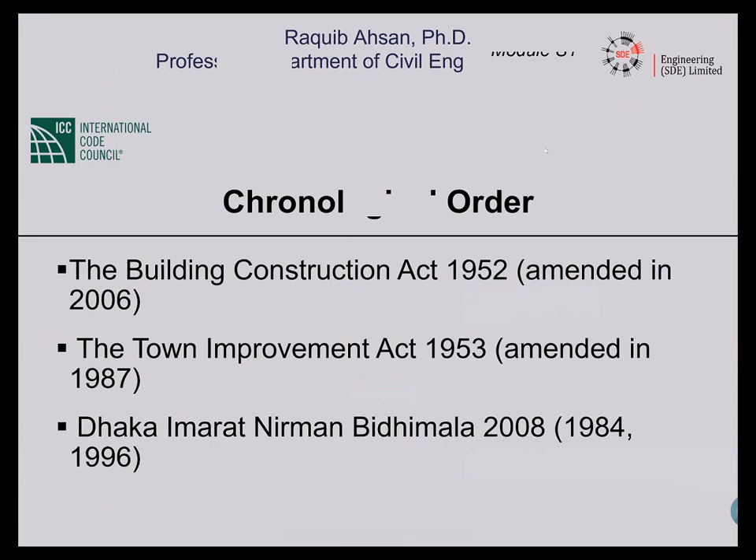Dr. Ghosh has already mentioned that the Building Construction Act came first. That was enacted in 1952. But later, this act was finally amended in 2006. During that time, the Bangladesh National Building Code was mentioned in this act. And the next year, in 1953, the Town Improvement Act was enacted.

It was amended quite a number of times. And the most important amendment came in 1987 when Rajuk was established. Before that, it was DIT, Dhaka Improvement Trust. But through the amendment in 1987 of the Town Improvement Act, Rajuk came into being.

And the last one, chronologically, Imarat Nirman Bidhimala, or Building Construction Rules, was drafted and changed quite drastically a number of times: 1984, then 1996 was completely a new set of rules, and in 2008 it was drastically changed. And presently we follow Dhaka Imarat Nirman Bidhimala that was drafted in 2008 and gazetted in 2008.

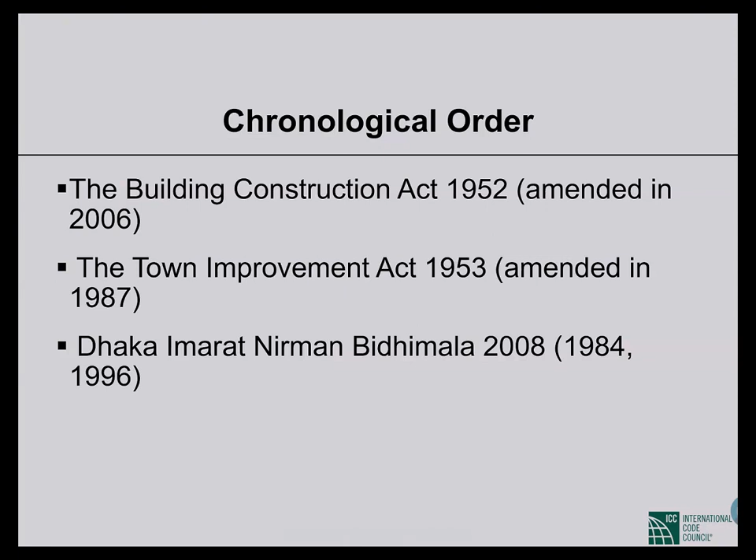So I'll follow this chronological order because this order makes it easy for us to understand the context of one law, how it is related to the previous one. So I'll follow this order instead. So first we'll talk about the Building Construction Act 1952.

And we can rather question how the act actually helped us to prevent the haphazard construction. So it's all up to you. We'll not go into that discussion, but that is the purpose. Second, what is the extent of this act? That is, where it is applicable. It is applicable over the whole of Bangladesh, in the entire country. So this is important. All acts are not applicable over the entire country, but this one is.

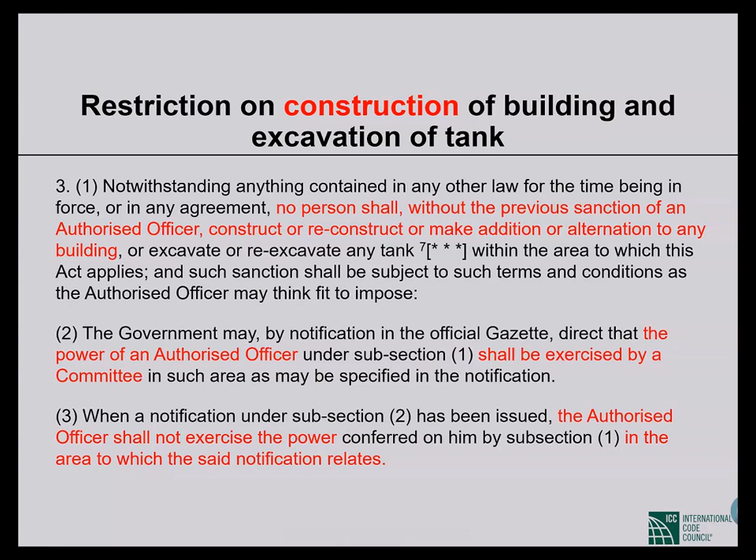Now, as it is mentioned that there are restrictions on construction of building, that is, you need permit to construct a building. Now, to use a building, you need permission, so that you cannot use a building improperly. So this is restriction on improper use of lands, not only building, lands and buildings.

If you use it for any other purpose, for example, in the permit it is written residential, if you use it commercially, you cannot do that. You need to take permission for that. You need to have permit.

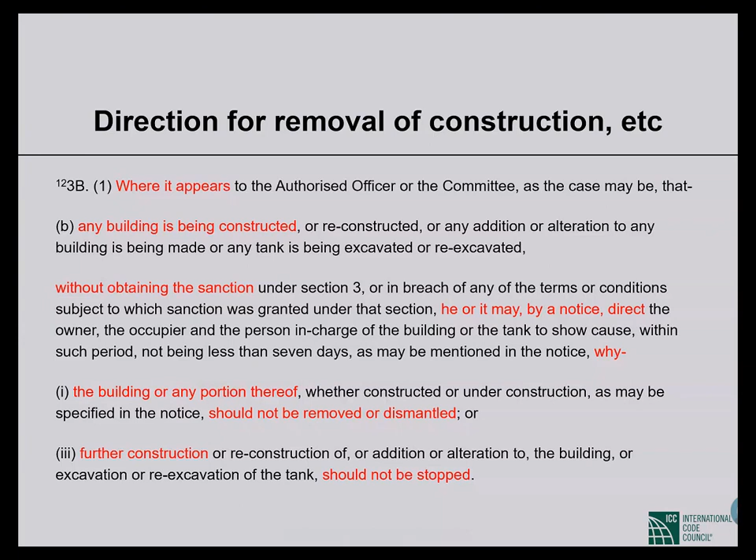So as soon as the notice is served, the owner must stop construction of that building. The owner cannot continue construction unless he shows cause and the cause is satisfactory and the case is vacated. Unless that is done, with the issuance of the notice, the construction work must stop.

Now, penalty. One power the authorized officer or committee enjoys is that they can direct stopping a construction or removal of a building, and at the same time this is a punishable offense. Violation of any provision of this act is a punishable offense. Let's see what it says. Subclause 12 is regarding penalty. 12.1 says, whoever commits an offense by — so what are the offenses?

A, contravening the provision of section 3, that is, you must have a permit. If you don't have a permit, you cannot construct. If you contradict that, that is, you start construction without a permit, then you are punishable.

B, failing to comply with any direction given to him by an authorized officer or a committee under section 3B, or by an authorized officer under section 4 or subsection 1 of section 5 — whatever the direction of the authorized officer or committee is, you have to comply with that. If you don't, you are committing a punishable offense.

C, designing or approving or implementing a building construction plan in contravention to any provision of the Bangladesh Building Code made under section 18A and the rules made under section 18. This is very interesting — here it is the first time that building code is mentioned in this act, in the penalty section clause, that whoever designs, approves, or implements anything in contradiction to the Bangladesh Building Code.

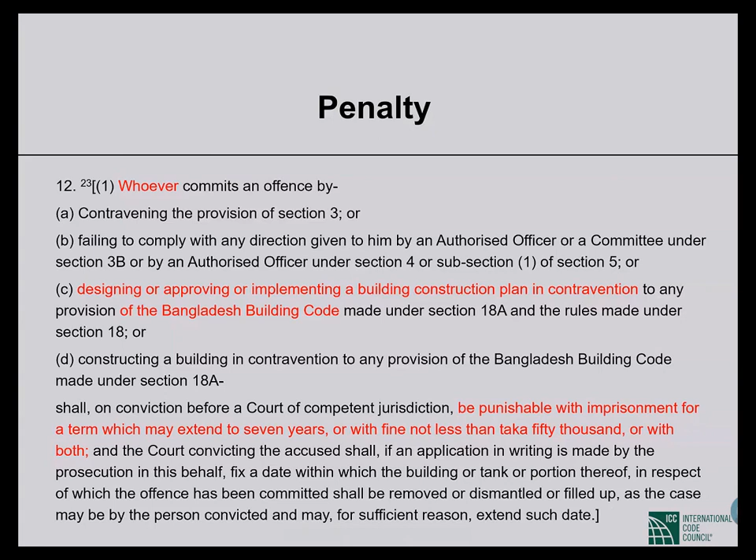Cognizable means the police can arrest the convicted person, or for alleged conviction, without any warrant. So a police can arrest if the authorized person or officer finds that this person is guilty. The police can arrest without warrant and start an investigation without the permission of the court. And non-bailable means he cannot apply for bail even. So he has to be in jail, or in police custody.

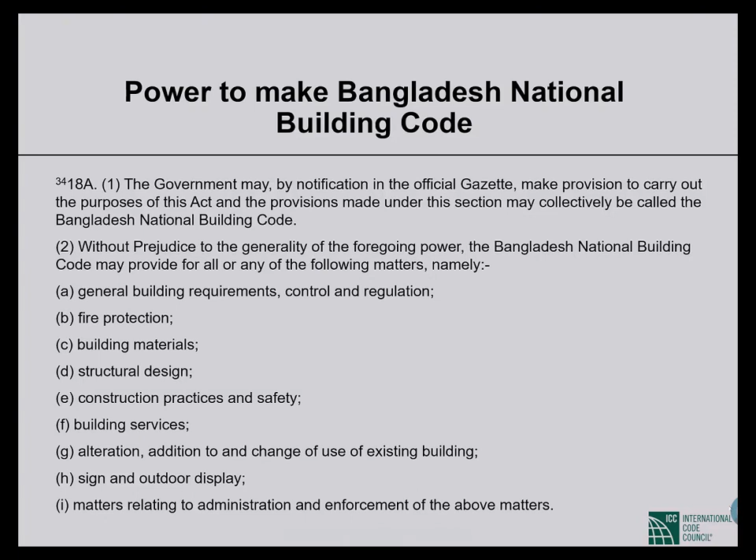Let's talk about the Town Improvement Act 1953. So it was enacted in 1953, but it was amended quite a few times. The most important amendment was done in 1987 when Rajuk was formed from DIT, Dhaka Improvement Trust. So the presentation now will include the amendments. So the organization of this act is a bit different from the BC Act, Building Construction Act. In the BC Act, there are sections and subsections. There are no chapters. But the TI Act, Town Improvement Act, is organized in chapters. There are 8 chapters.

Preliminary. Second chapter is called the Kotripokho. Third chapter, improvement schemes and rehousing schemes. Fourth, acquisition and disposal of land. 5, rules. 6, finance. 7, again rules. Chapter 8, supplemental provisions. Now, most of the clauses or sections of this act are related to development activities that Rajuk usually does. Land improvement and selling plots to the public, and selling apartments to the public, that type of activities. So this is related to the constitution of Rajuk, that is formation of Rajuk, and those development activities.

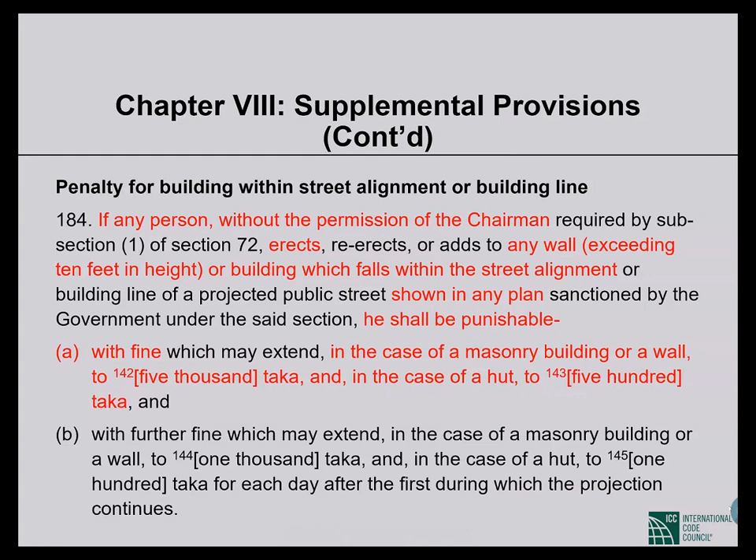But if you were intelligent enough, now we can go and construct a concrete building on the road and you can avoid the punishment. Just joking. Anyway.

So there are many other things in the TI Act, but I have mentioned a few clauses which I found interesting and which I thought may be indirectly related to our topic of building code enforcement. Now I'll go to the most relevant legal document with BNBC, which is the Imarat Nirman Bidhimala 2008.

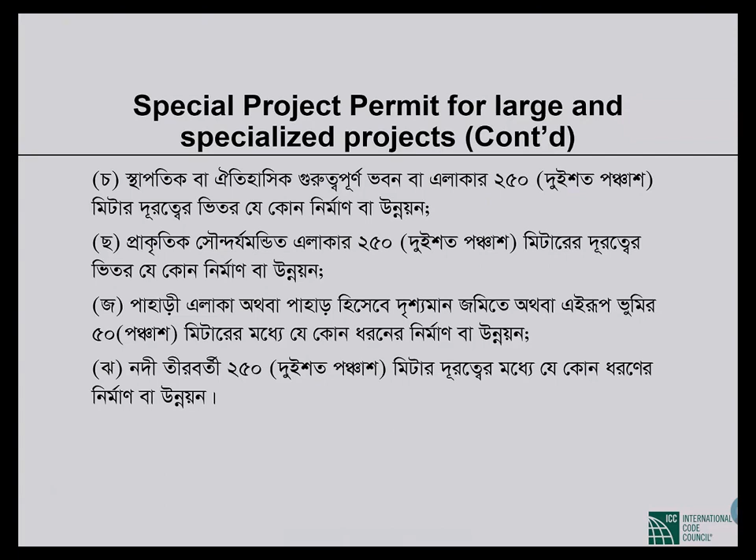Within 250 meters of the river bank, so if it is just by the side of the river bank, then you have to take the permission. So this is special project permit. You don't always have to take this permit, but you have to take this permit for sure, building permit. This is important.

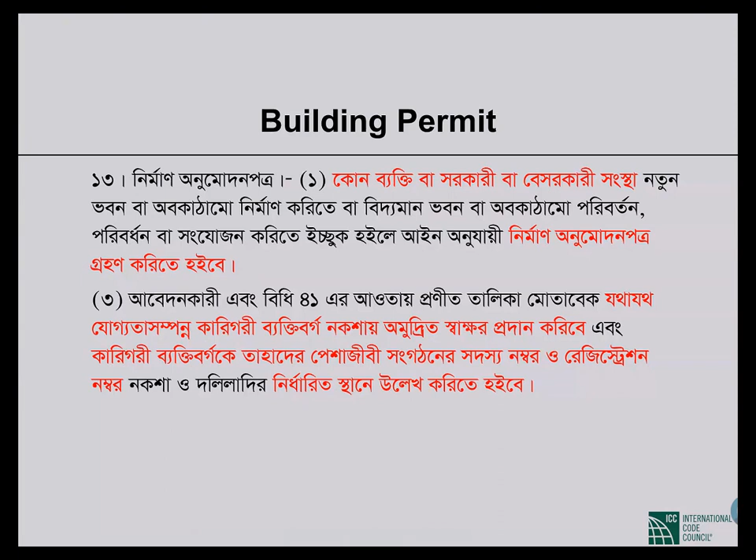Duties and responsibilities of the applicant. So whoever applies for the building permit, what are the duties and responsibilities?

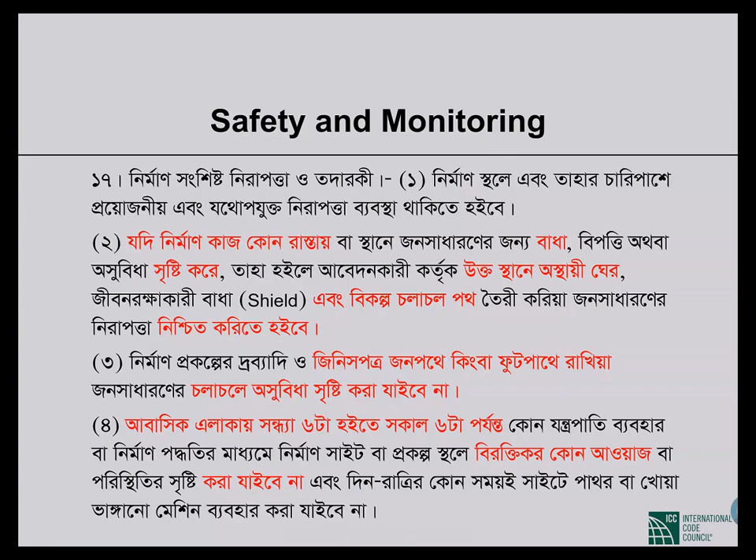So first of all, this was safety and monitoring, নিরাপত্তা ও তদারকি. It is not supposed to be in the Bidhimala according to the BC Act, but it is there and it is repeating some of the clauses from the code. I'm just pointing out the anomalies between the Bidhimala and the Act. You just have to be aware of that, but we cannot do anything about it. There is an ongoing process of updating this Bidhimala. I hope the people involved in updating it will look into this.

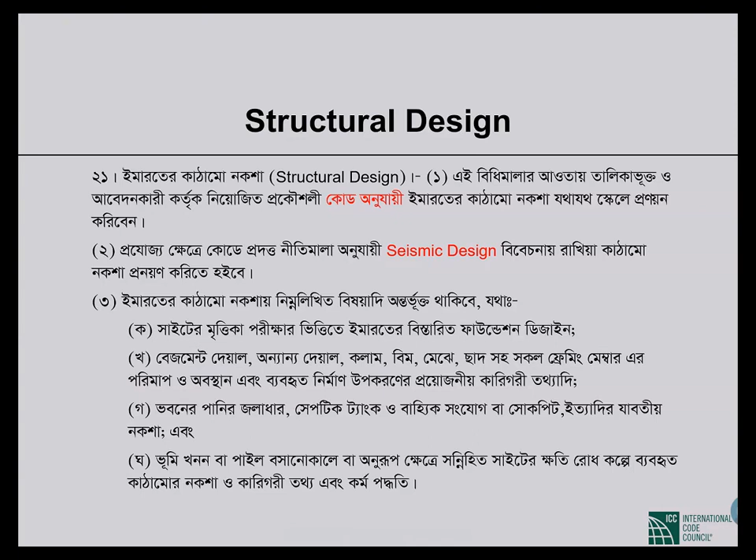Basement, etc. So there has to be sewage system, plumbing, all these things in the design. But under the heading of structural design, these things are written. That is interesting. Imarat Sheba, building services. Sorry, I'm wrong. There only ভূমিখনন পাইল বসানোর ক্ষেত্রে সাইটের ক্ষতিগ্রস্ত নকশা, etc. Related to foundation, but septic tank, these things are mentioned.

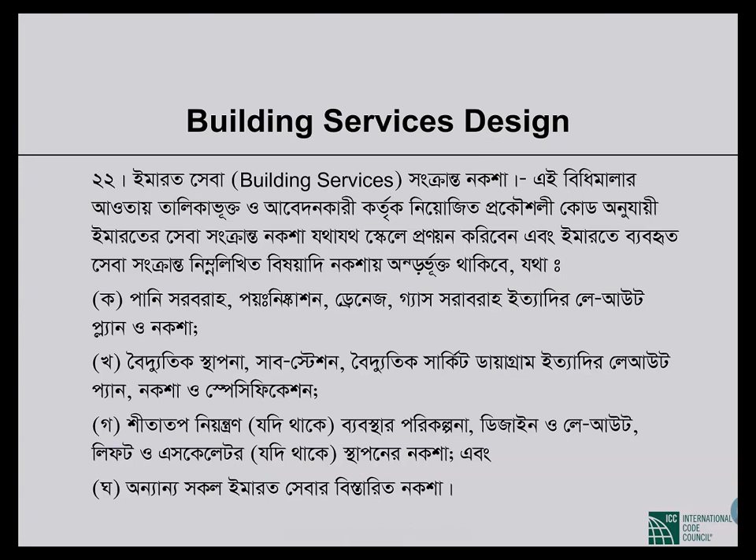But in the services, পানি সরবরাহ, পয় নিষ্কাশন, drainage, gas, these will be there. Electrical substation, these designs must be there. Air conditioning. So all the building services designs, you have to submit for occupancy certificate. And the validity of the occupancy certificate is not eternity. You have to renew the occupancy certificate every 5 years.

And whenever you apply for occupancy certificate, there is supposed to be an inspection. So after every 5 years, there is supposed to be some inspection. And there is provision when you need lift, elevator. There is validity for building permit too, 3 years. What does it mean? If you obtain a permit, but within 3 years you don't construct anything and leave the plot vacant, then you have to apply again for the building permit.

So this is important, committees. Oh, I have many more things to cover. Sorry, I'll go a little bit fast now. So committee,

I talked about mandatory uncovered area that is mentioned here. It talks about maximum ground coverage, floor area ratio, and parking facilities. But these are all mentioned even in the building code. So these are either repetitions or duplications, and in some cases there are contradictions. And first of all, these are not supposed to be in the Bidhimala according to the BC Act.

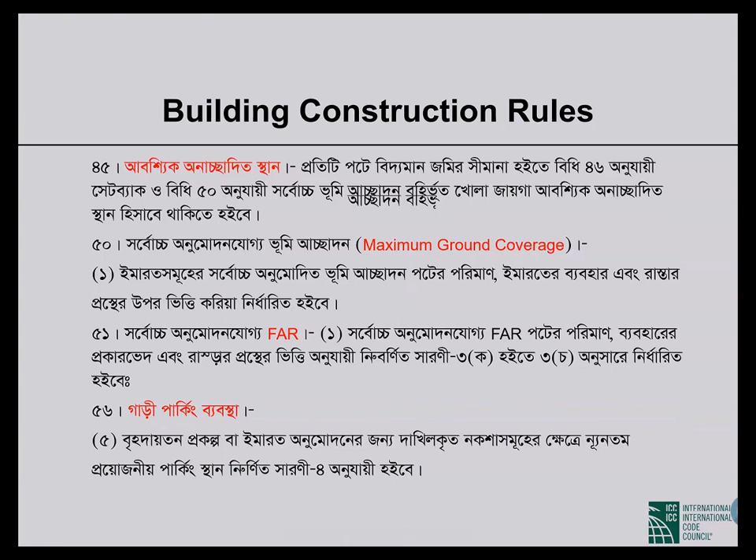Interestingly, what is written here is priority - বিধিমালার প্রাধান্য, এই বিধিমালা ও কোডের মধ্যে কোনো প্রকার বিরোধ বা অসঙ্গতির ক্ষেত্রে এই বিধিমালা প্রাধান্য পাইবে, তবে যে সকল বিষয়ে বিধিমালায় সুস্পষ্ট উল্লেখ নাই সেই সকল ক্ষেত্রে কোডের বিধানাবলী প্রযোজ্য হইবে। So this is interesting - if there is any conflict between the code and the Bidhimala, the Bidhimala will prevail.

Whereas there shouldn't be any duplication because the scope is clearly defined in the BC Act and the scope is completely different. But while preparing this Bidhimala, it is prepared in such a way that there are overlaps with the code, and that's why you need this clause.

In many cases in the Bidhimala and in the Act, it is mentioned that the government will come with some notifications for specific purposes. One of those purposes is the BC committee, formation of BC committees. So in the notifications, the government talks about, or has formed, 3 types of BC committees.

One is the one-man committee, where only the authorized officer is the committee. For what type of building? It is written in column 5 - for low-risk store and warehouse structures. For those structures, the authorized officer himself or herself is the committee, a one-man committee. For other structures, except low-risk structures up to 8-storied height, below 9-storied, there will be BC committees - 3 committees for each of 8 zones.

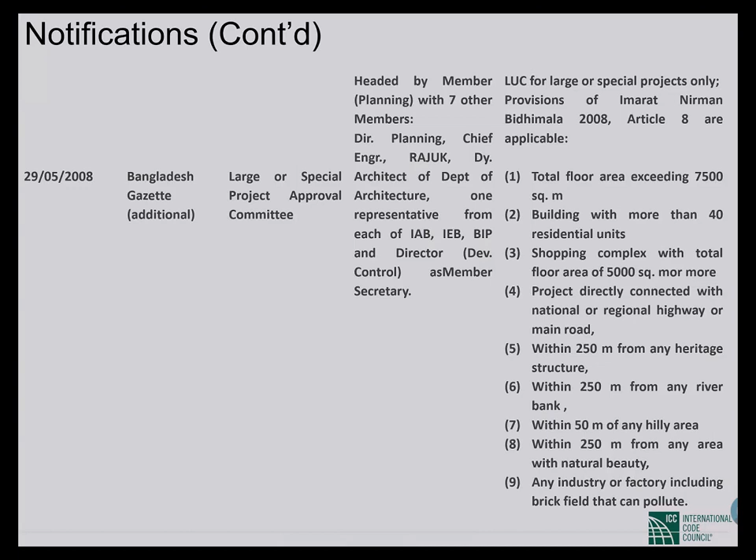For other cases, not low-risk structures, there are different committees. For large and special projects, for the approval of large or special projects, there is a special committee headed by member planning with 7 members, etc. It's all written. And what are the special projects? It is mentioned here again in column 5, similar to what is written in the Bidhimala.

The Bidhimala also talks about the Town Improvement Committee. It was gazetted by notification in 2008. So this is the composition - a high-level committee headed by the Secretary of Ministry of Housing and Public Works. This is the composition of the Nagar Unnayan Committee.

This is the appellate body. The appellate subcommittee of the Nagar Unnayan Committee does all the activities mentioned in the Bidhimala. For appeal resolution purposes, there is a subcommittee, the appellate subcommittee, formed by gazette notification in 2019. That is headed by Chairman Rajuk, and some other members are there, as mentioned here.

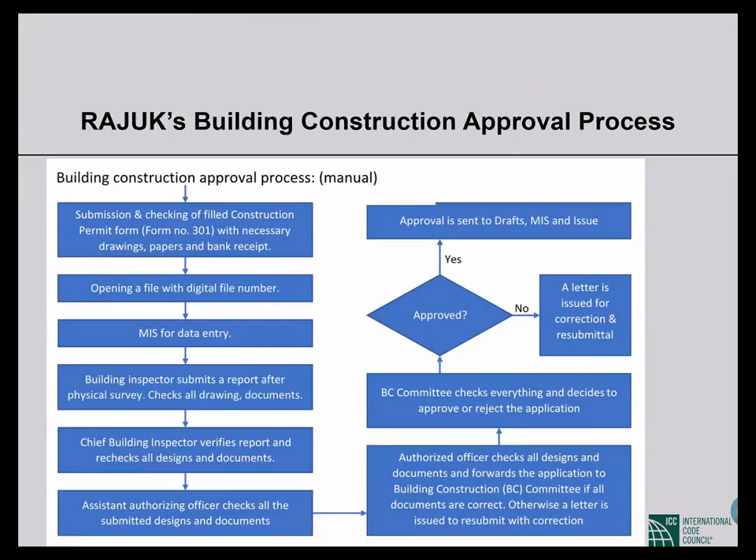This is important - this is for simplification of the plan permit system. For special projects or high-rise structures, you were supposed to take permission from different organizations previously - NOC, No Objection Certificate, from 11 organizations. That has been simplified by Gazette notification in March 2019.

You can read it - I hope you have the printout of this presentation there, it is self-explanatory. So you don't need NOC from, say, FSCD if it is not 10 stories or higher.

You don't need NOC from the DOE if that is not applicable. For example, you don't need NOC from civil aviation if your structure doesn't fall into the air funnel, things like that. Previously, all applications used to go to 11 organizations. That has been simplified by this order.

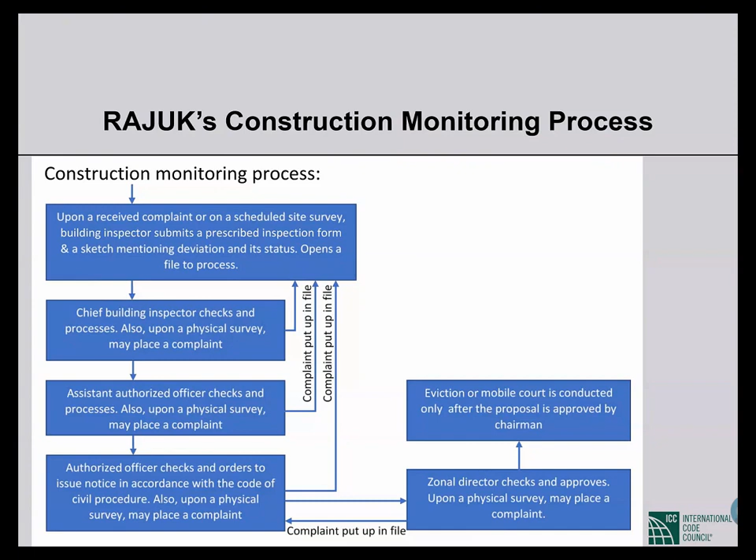This is a kind of repetition, I'll skip these. For the construction monitoring process, that is like an inspection - once you apply for a building permit, once you start construction up to the plinth level, there are stages of inspection. How the inspection activities are carried out, the process is given here.

Now the fire safety inspection - this is important, I want to spend a few minutes on this. Fire safety inspection, where does it come from? The power and responsibility of fire safety inspection is given to the Fire Service and Civil Defense, FSCD, by a gazette notification. If a structure is more than 10 stories or 33 meters, then FSCD will inspect for fire safety.

This is not given by the BC Act. This responsibility is not given by the code. Rather, the building code says that the authority - the building official, that is the authorized officer - is the person responsible for making sure proper fire safety is there. Whatever is written in the building code, the fire safety provisions followed in a specific building, is the responsibility of the building official or authorized officer.

But by government notification, the power has been given to the Fire Service and Civil Defense. Actually, Fire Service and Civil Defense is under the Ministry of Home. Their activities are regulated by the Fire Safety Act, which is a different act related to existing buildings - in existing buildings, how much explosives you can keep, how much flammable things you can keep, things like that.

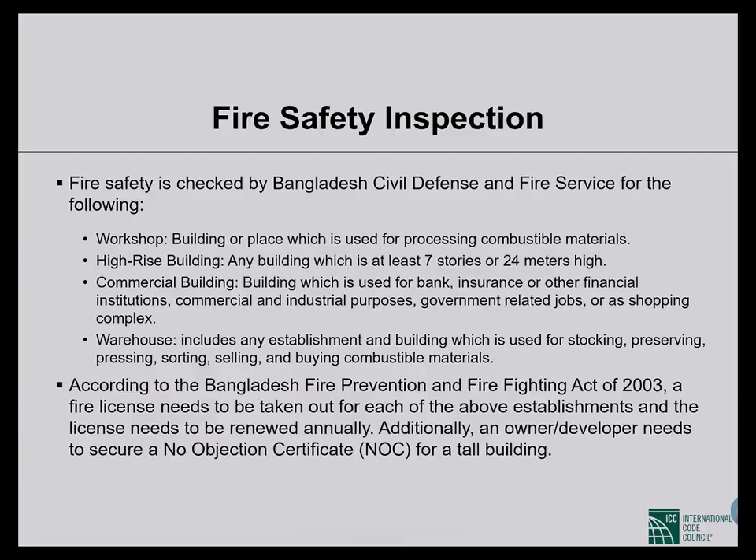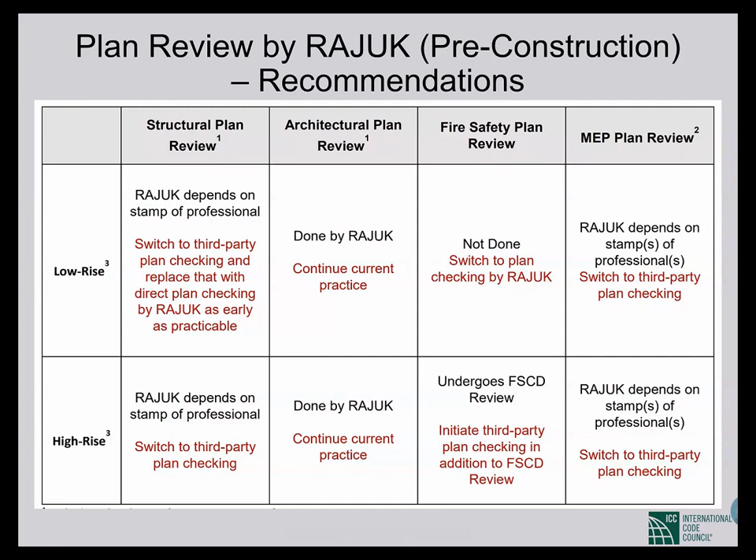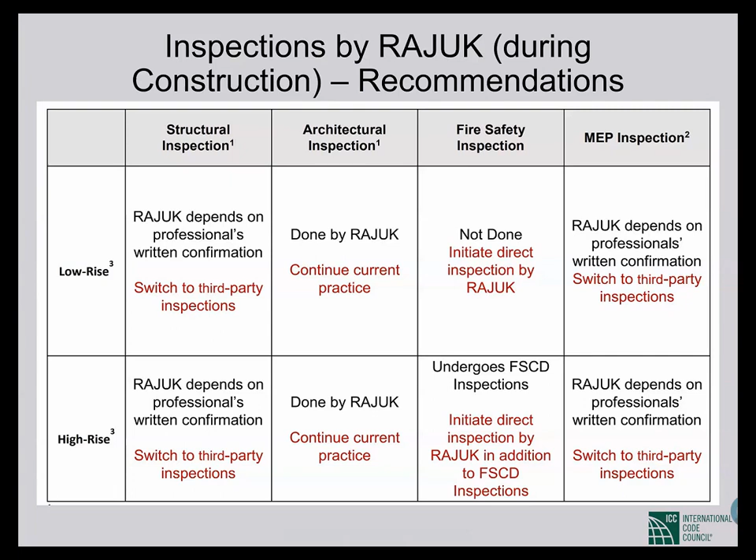That's why in this project, ICC is recommending changes in how the plan review process should be conducted. All structural plan, architectural plan, fire safety plan, and building services plan should be reviewed, and there are recommendations on how they can be reviewed. Even for inspection there are recommendations on who will inspect, how they will inspect, and what qualifications are needed. These are recommended in detail by ICC in this project, along with recommendations regarding issues, but I'm not going into those.

So I finish my presentation here. Thank you for your patience. If you have any questions, please write them in the question and answer box, and I'll try to answer.

I would request Mr. Shohidul Alam, ex-secretary of the Ministry of Housing and Public Works and ex-chairman of RAJUK, to help me in this question answer session, as I'm not a qualified person to answer all of your questions regarding these legal matters. Thank you so much.

So it appears we do have a number of questions, and today all questions are in the Q&A box. Although, you'll have to ignore some of the questions that are related to people having audio issues, so just ignore those. I have already responded. But thank you.

In the question and answer box, I find someone has asked about the stiffness modifier value we should use during analysis as well as designing of a framing object, according to BNBC 2020. I didn't get the question fully, and it is not related to today's presentation, but we'll keep this in our record and try to answer you back. I think this is related to some other session which will be covered by Dr. Ghosh.